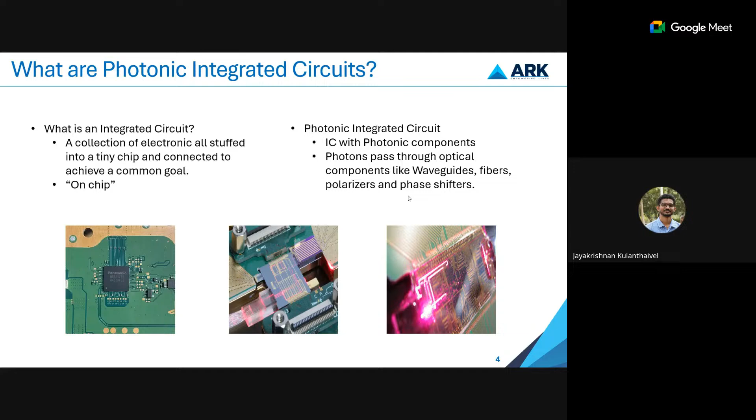In PICs, we use a laser source to inject light into the optical components. The light is then transported through these optical components without any significant losses and with a wide bandwidth, for a particular common goal or specific application. Also, using light instead of electricity in integrated photonic technology provides a solution to the limitations of electronics like integration and heat generation, taking these devices to the next level.

With the inclusion of PICs in electronic integrated circuits, we realize many new possibilities. One of them is the ease of quantum computing. Quantum computing was already there even without PICs, but PICs made it faster.

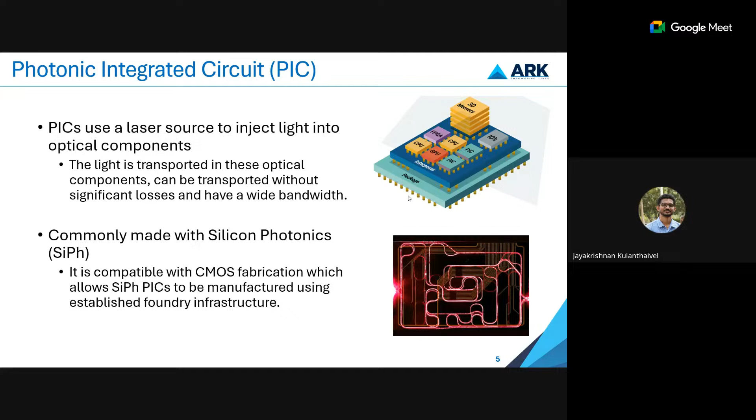The fabrication of these PICs is similar to the commonly used CMOS fabrication technology. The way we make EICs, electronic integrated circuits, we can make photonic integrated circuits. But electronic ICs are mostly made of silicon wafers, while in photonic integrated circuits, apart from silicon, we can use silicon nitride, gallium arsenide, chalcogenide glasses, lithium niobate, and other materials.

And how do these PICs work? PICs work on the principles of manipulating and harnessing light for a variety of functions. This involves photonic signal transmission from one end of the waveguide to the other, using different techniques like evanescent field coupling, total internal reflection, and plasmonic activity. They have active and passive components.

For example, a resonator will act as a wavelength filter. The purpose of a waveguide is to transfer light from one end to the other. Combined, they work together to achieve a common goal.

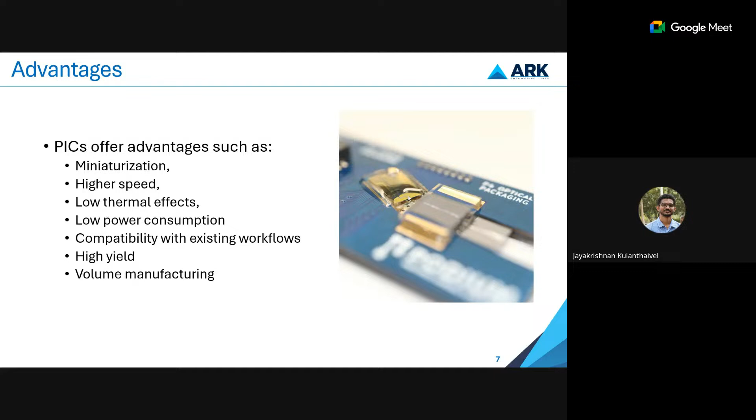Some applications of PICs are sensing applications - compact and sensitive sensors for temperature, pressure, chemical, and composite detection, used in environmental monitoring, healthcare, and industries. People are using PICs in the medical field for enhancing diagnostic tools, imaging, and therapeutic devices. One example is cancer cell detection, where these photonic sensors can be used effectively, and there are numerous research articles on that.

Another application is quantum computing, which we'll discuss in terms of potential quantum information processing and quantum state manipulation like qubits. We are able to generate qubit photon sources with the help of these PIC networks.

LiDAR systems are used in autonomous vehicle systems as well as in military and aerospace. Spectroscopy is used for chemical analysis, material characterization, as well as environmental characterization. Then military and aerospace - PICs are used in communication systems, sensing technologies, as well as imaging devices.

Why we are using these PICs in military and aerospace is because they are resistant to electromagnetic interference. Either the electric field or the magnetic field won't interfere with the propagation of a photon, so it cannot be easily detected, and it has high performance as well. And in general consumer electronics: displays, cameras, and wearable devices. So PICs have a wide variety of applications.

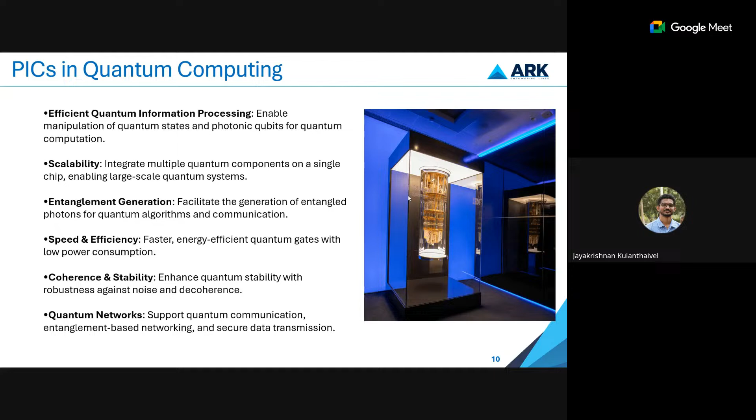Now we have discussed photonics and photonic integrated circuits. Now, why do we need simulations? For developing these photonic integrated circuits, since they are CMOS fabrication compatible, we could directly go for fabrication. So why do we need simulations before going into fabrication? Because PICs are very expensive in R&D and hard to prototype. Technically, developing these photonic integrated circuits to achieve a common goal is an iterative, repetitive process.

For example, if you're designing an optical fiber to transmit 5 gigabytes of data with minimal loss, you have to optimize it for better performance - changing the core width, using different materials, using a different wavelength. This is an iterative process, so we cannot achieve optimal performance initially while developing the prototype. Simulations help us reduce that and cut down costs, because optical components are very costly to fabricate. We can test and analyze the performance of photonic integrated circuits and predict more accurate outcomes.

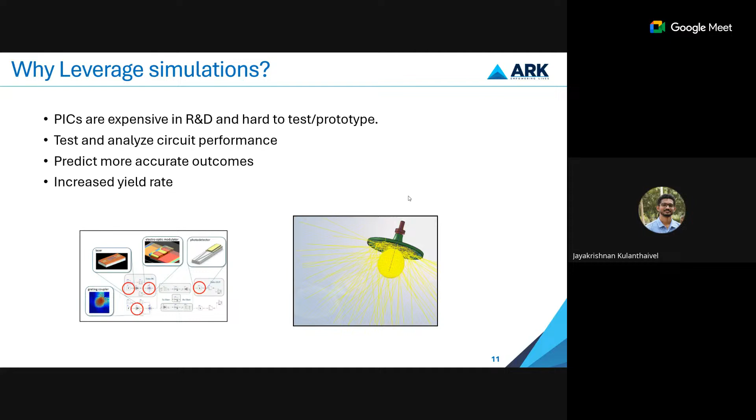If, while doing the simulations before going for the prototype, we are able to identify issues, it will save us a lot of money. So early issue detection is very much possible with simulations, as well as reduced prototyping, and it increases the yield rate - we can produce more prototypes or the things we want within a short span of time. These are the reasons for us to leverage simulations in developing photonic integrated circuits.

In ANSYS, we have a complete system optimization and collaboration consolidation for developing different kinds of physics. We have different physics-based simulation softwares: here for structures, this is for mechanical fluids, for computational fluid dynamics.

We have dedicated electronic simulation softwares specifically for semiconductors, and we have optical, 3D, and photonic softwares. All these softwares are multi-physics, which means if you did something with structures, you can use the output of that as an input in the optical simulation. This helps us create complex models involving multi-physics simulations, like a CubeSat.

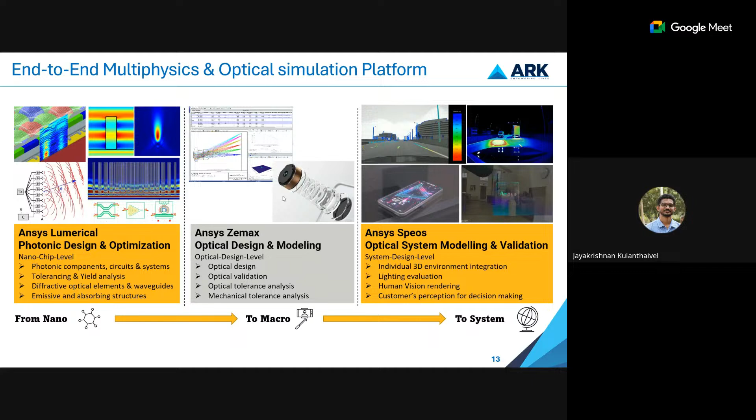Our ANSYS Optics suite offers an end-to-end multi-physics and optical simulation platform. We all know that light behaves differently with different matters. It is a multi-scale platform. For example, light interacting with a nanomaterial is different than it interacting with the material of macro systems like lenses and mirrors.

At the larger level, we cannot observe certain phenomena like diffraction and interference. But at the nano level, we will be able to observe many other phenomena as well, which includes plasmonic activity.

For this multi-scale physics, we have three different softwares. One is ANSYS Lumerical, our photonic design and optimization software. We have ANSYS Zemax, which is specifically for designing optical systems like lenses, mirrors, and lasers. And we have our optical system modeling and validation software, ANSYS SPEOS, specifically for designing lighting systems—ambient, outdoor and indoor lighting—as well as human 3D integration and all kinds of related things.

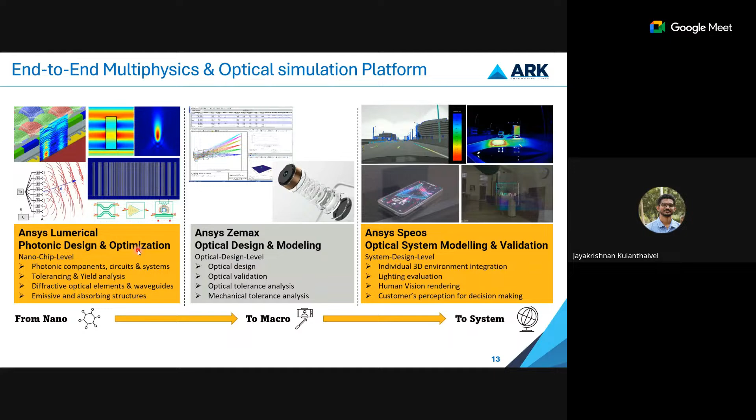Totally we have three different tools, but here we are going to discuss ANSYS Lumerical for developing and designing photonic integrated circuits, which involves two different types of physics. Technically, these softwares solve problems by employing mathematical techniques as well.

But in the case where the feature size is much greater than the wavelength—for example, if we are using visible wavelength and the size of the materials are in millimeters or meters—we will use ray tracing, considering light as a ray that travels in straight lines. But when feature sizes are on the order of the wavelength, we consider light as traveling as a wave, and at that time we have to use wave optics.

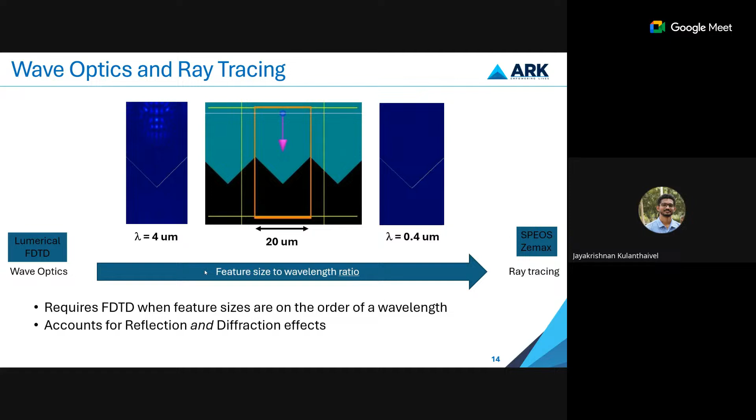This is a brief introduction to ray optics. Ray optics is based on straight-line propagation of light, dealing with mirrors, lenses, refraction, and reflection. In ray optics, we won't discuss phenomena like interference, diffraction, and polarization, which cannot be explained with ray optics. Ray optics is well suited for explaining phenomena in mirrors, lenses, and lasers, where we consider light traveling as straight rays.

This means the optical suite that we have, Zemax and SPEOS, employs this ray optics technique to solve problems. Wave optics is also called physical optics, but it deals with various phenomena other than reflection and refraction—polarization, diffraction, interference, and other occurrences where the ray approximation of geometric optics is not appropriate.

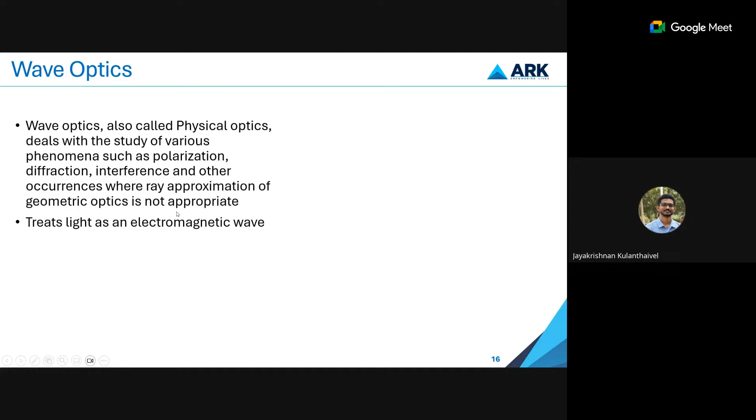In wave optics, we treat light as an electromagnetic wave. Generally, the numerical tool mathematically predicts how photons move through space or a material using four differential equations—Maxwell's equations—which govern how an electromagnetic wave propagates in free space. Our numerical tools, especially Lumerical FDTD, use FDTD as one type of solver.

Numerical solvers will solve these Maxwell's equations to predict how photons move through space as well as how they interact with the material.

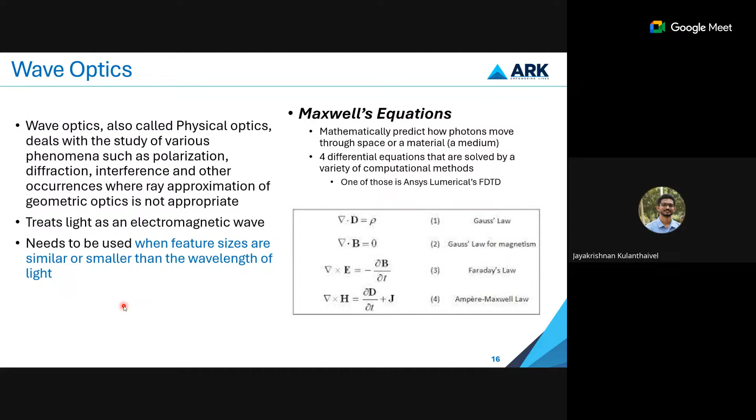So we can use this when the feature sizes are similar to or smaller than the wavelength of the light. If the feature sizes are larger than the wavelength of the light, at that time we have to use ray optics.

So who is Lumerical? Generally, Lumerical is the industry leader for photonics multiphysics simulations, though there are other photonics multiphysics simulation software like Comsol and Synopsys. Lumerical is the industry leader and continuously innovates solvers to complete their photonics portfolio for multiphysics. We have this multiphysics feature, and we have also partnered with Cadence and Mentor.

Cadence and Mentor are actually electronic IC, analog and digital circuit development platforms. This workflow integration with Lumerical allows us to develop complex PICs with ease. And we have partnered with many industry leading foundries like CompoundTek, TSMC, UMC for PDK development.

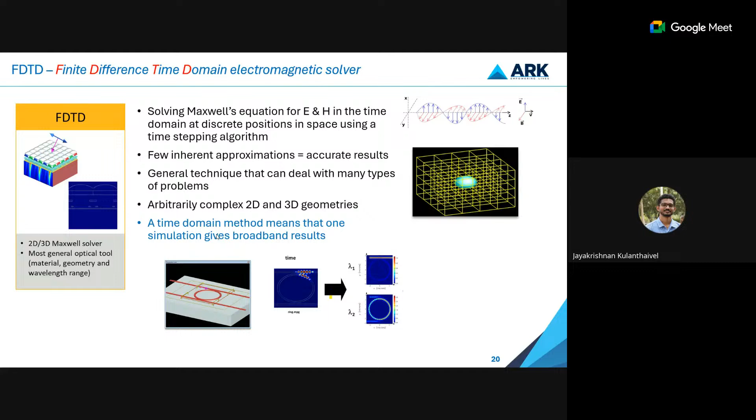And these are some of the applications: diffraction gratings, meta lenses, liquid crystal metrology, LEDs, and image sensors as well.

Next, within FDTD, we have another solver called the Stack optical solver. The Stack optical solver is similar to FDTD, but it gives us the solution particularly for plane waves incident on a multi-layer stack - for example, a Bragg grating or a distributed Bragg reflector.

At that time, you don't need a complex simulation - there will just be reflection and transmission at each interface. So in order to solve these kinds of simple structures, Stack is preferred because it is fast and it allows length dependent optimization. You can optimize the length easily in this Stack optical solver, much faster than FDTD.

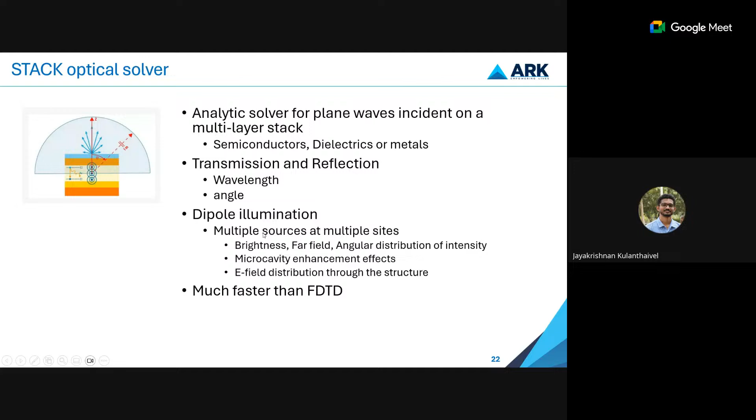So we can record the transmission and reflection, and we have dipole illumination sources as well. We can place multiple sources on multiple sites with the help of the Stack optical solver. Some applications are lenses, anti-reflective coatings which involve multiple film designs as you can see here, and multicolor filters and LEDs.

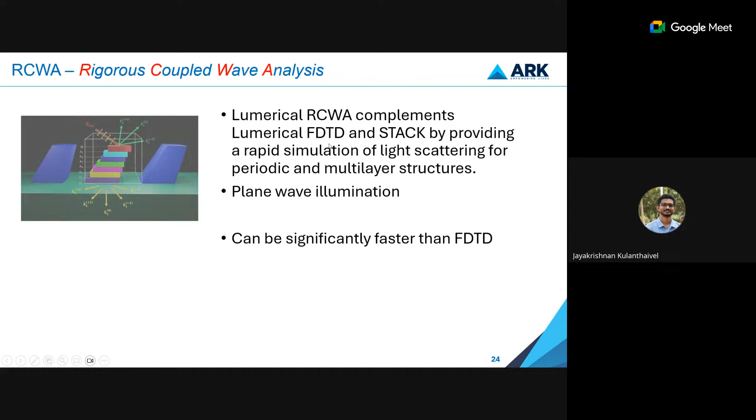And one more solver is rigorous coupled wave analysis. This one complements FDTD and STACK by providing a rapid simulation of light scattering for periodic and multi-layer structures, which is similar to that of STACK. But it has only the plane wave illumination; it doesn't have the dipole illumination and the other capabilities that STACK has. It is actually complementing these two solvers. Both of those solvers, RCWA and STACK, will be much faster than FDTD. Some of the applications are photonic crystals, metalenses, and diffraction gratings.

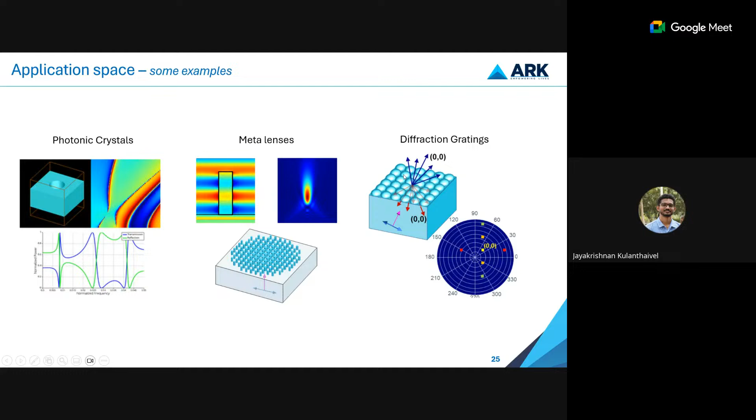The next solver is Ansys Lumerical MODE. Within MODE, we have FDE, EME, and the variational FDTD solver. When light travels through materials with different refractive indices, it can be guided. MODE has 3 separate solvers for different classes of waveguides. We are not only having rectangular or slab waveguides, we'll be having strip waveguides, slot waveguides. So for different classes of waveguides, MODE has 3 different solvers. MODE is specifically used for modal analysis and mode propagation as well.

So we have FDE, which is a finite difference eigenmode solver. Using this solver, we can analyze the modes of 1D and 2D, modes of straight and bent waveguides; it's a mode analysis tool. The next one is varFDTD. varFDTD is nothing but a 2.5D variational FDTD solver. Instead of using FDTD, you can use this variational FDTD solver for simulating components like ring resonators and couplers. Variational FDTD can be used for almost 90% of photonic component simulation.

This variational FDTD can be used as an alternative to FDTD for components like ring resonators and couplers. It cannot be used when there is vertical coupling. Let's say I'm propagating the light along the x-axis, and I observe the coupling in the z-axis. Then I cannot use this variational FDTD solver; instead, I can use the FDTD solver. But if the coupling is happening horizontally in the same plane, then we can use this solver. It will collapse the 3D planar waveguide geometry into 2D effective materials. Thereby, we are able to get FDTD-accurate simulation results with this solver as well.

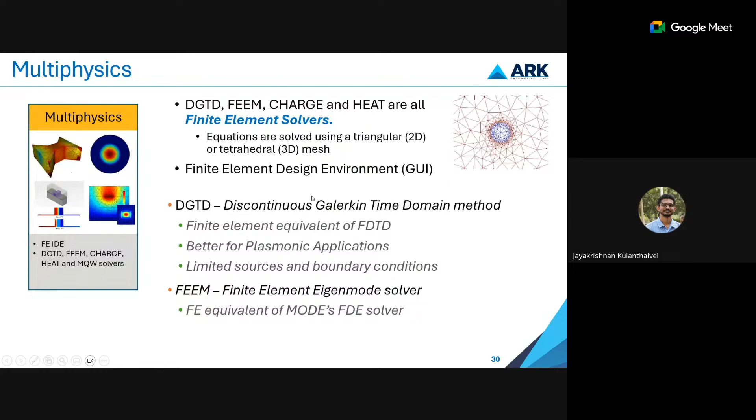And we have two other solvers, CHARGE and HEAT. CHARGE is a charge transport solver. It looks at the electrical properties of charges as they move through metals and optical materials as well as through semiconductors. This is often used in combination with FDTD. Light absorption is modeled with FDTD, then the collection of generated charges is modeled using CHARGE.

So with the help of CHARGE, one perfect example for using this Lumerical multiphysics is developing a solar cell. Not solar panel, we have to be very careful, developing solar cells actually. Next, some of the applications are CMOS image sensors, LEDs, and avalanche photodetectors.

And HEAT. It's a heat transport solver. Unlike CHARGE, which is an electron charge transport solver, this is a heat transport solver. Some of the things that we can do with this, we can observe conduction, convection, radiation, and Joule heating. What the solver is actually doing is showing how the thermal profile in a material is altered when the material is subjected to electrical heating, which means when you are passing a current, as well as optical heating, how the thermal profile is changing when it is absorbing light.

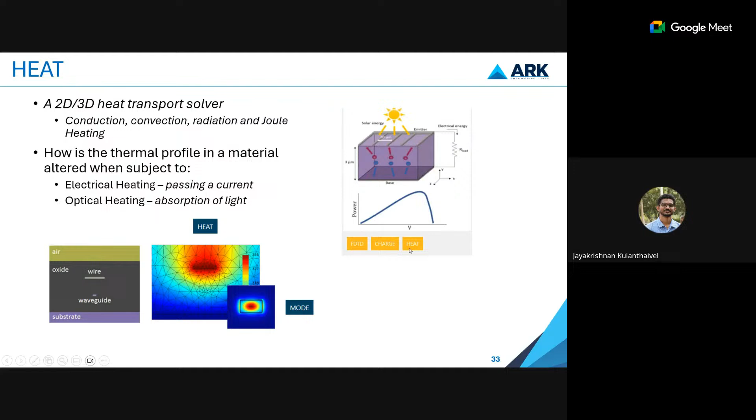So next is the multi-quantum well solver. This solver is specifically used for quantum mechanics. Quantum mechanics, as we know, is a little bit different from classical mechanics. The study of subatomic particles reveals unique and fundamental natural principles. Some of these fundamental phenomena can be effectively simulated with the help of the MQW solver. It has a large material database of group III-V semiconductors.

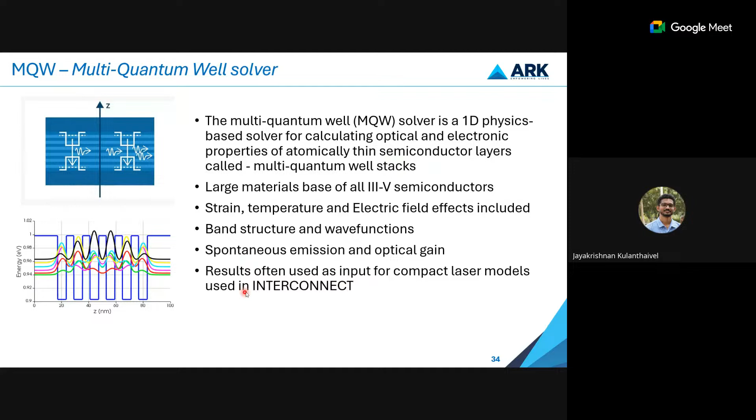Strain, temperature, and electric field effects are included. We are able to analyze the band structure, and it has wave functions, spontaneous emission, and optical gain features. These results are mostly used for compact laser models in INTERCONNECT. So the output of this can be used as an input when we are developing a compact laser model in INTERCONNECT. Some of the applications are the active region of lasers, electro-absorption modulators, and developing micro LEDs.

So with the help of MQW, this quantum well solver, as well as the CHARGE integration, which is actually a new feature of Lumerical, the applications are reverse biased electro-absorption modulators and forward biased LEDs with active quantum wells.

So for photonic integrated circuit simulation, we have a dedicated solver, which is INTERCONNECT. It simulates at the integrated circuit level. With the help of INTERCONNECT, we can develop classical PICs as well as quantum PICs, and we can develop a traveling wave laser model as well.

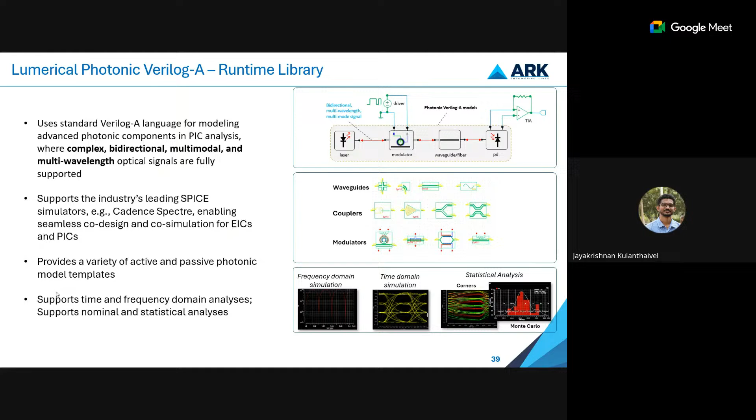And next, Cadence Virtuoso plus Lumerical interoperability. I hope the people who are working with electronic ICs might have heard about this Cadence Virtuoso software. Cadence is one of the leading software for developing analog and digital electronic integrated circuits. So integrating Lumerical with Cadence Virtuoso will help us to effectively develop electronic and photonic integrated circuits together.

And next is KLayout. KLayout is actually a CAD design software. It is used to design layouts for photolithography techniques. So whatever we are designing, we have to print it on a silicon chip or other wafers. For that, we need to design our structure, right? So for that kind of design, we can use KLayout.

With the help of this integration with KLayout, we can export the layout to Lumerical multiphysics tools, as well as use these process files to construct 3D structures for simulation. With the help of this, we can directly extract the circuit layout netlist to build a Lumerical INTERCONNECT circuit schematic, and within KLayout we can also do frequency and time domain analysis.

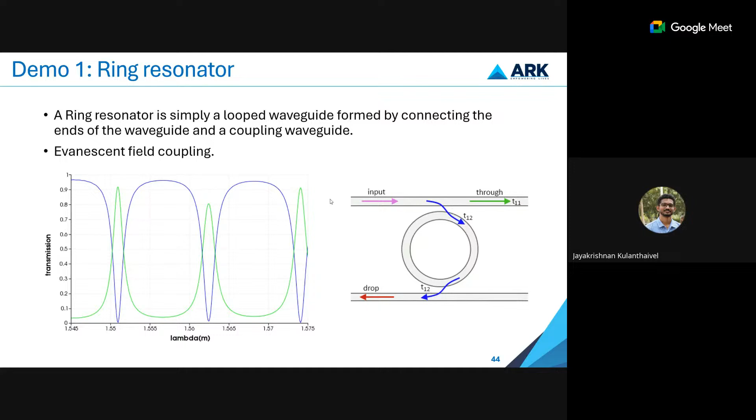Ring resonators are widely used in almost all places. It is one of the key components, like transistors in electronic ICs. The ring resonator is a very important component in photonic integrated circuits. Some of the applications are optical filters, modulators in telecommunications, sensors, frequency comb generation and supercontinuum generation, like nonlinear optics, and also quantum computing.

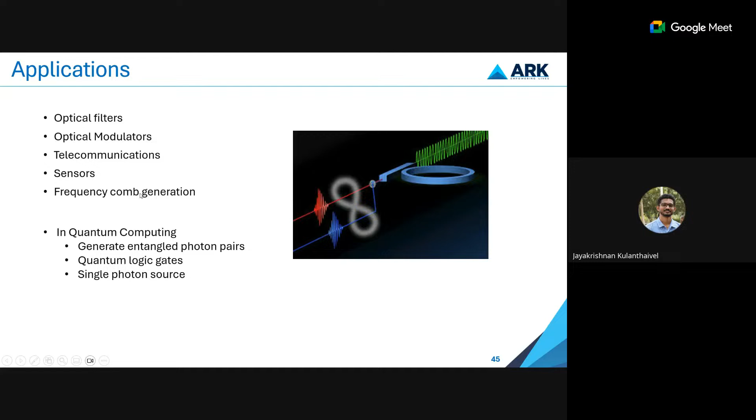In quantum computing, we can generate entangled photon pairs. One such example is wave mixing, then four-wave mixing. Then we can develop quantum logic gates with the help of these ring resonators, and it will act as a single photon source as well. So technically, a ring resonator is actually a photonic device.

This ring resonator can be simulated both on the device level with physics-based simulation tools such as FDTD or MODE, or with circuit level simulation like INTERCONNECT. We are going to simulate the ring resonator in INTERCONNECT. This is the double bus ring resonator, which means it has two waveguides on both ends, and between the waveguides we have this ring structure.

We are segregating this physical model into different components. There are two straight waveguides here, and there are two waveguide couplers, which means here the coupling will happen, and there are two bend waveguides. By dividing the ring resonator into different segments, we will be able to effectively develop a ring resonator circuit

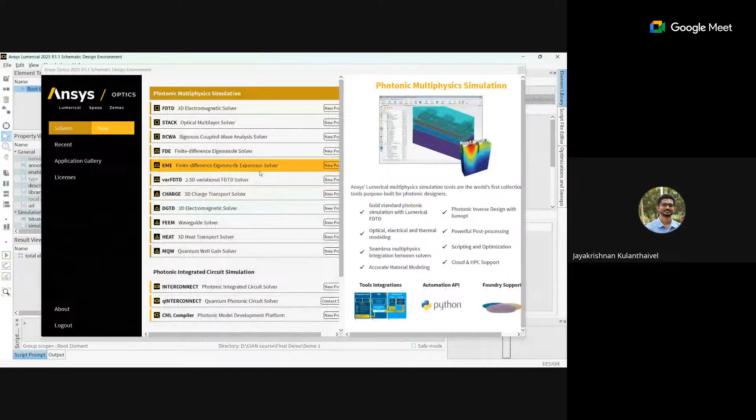Now I'll take you to the INTERCONNECT interface. It's loading, it will take some time. This is our INTERCONNECT schematic editor.

At the center you can see this root element.

I hope my screen is visible. Can anyone confirm it?

This is where our circuit will look like, and this is our library. We'll be inserting the components into the layout editor from this library. And here we'll see the description of the models we are selecting. If I click the waveguides, you can see the different waveguides we have here. And this is the property view. Whatever component I select, the corresponding properties will appear here. We can edit and modify the properties as well.

And this is the result view. Once we run the simulation, we will be able to observe the results here. Now we are going to develop a ring resonator structure. For that we are going to segregate it into different segments and develop it with waveguide couplers and straight waveguides. Now I went to the element library. Here you can see the waveguides. I'll start with the straight waveguide.

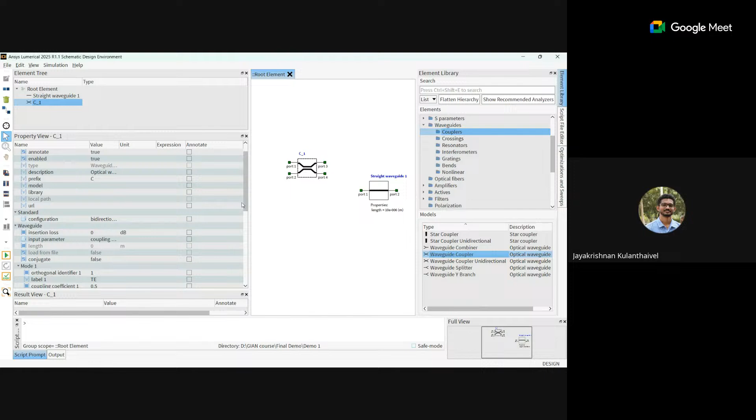Next we are going to import a waveguide coupler. Now I'm going to rename the coupler to waveguide coupler 1. And now I have renamed it to waveguide coupler.

So in a ring resonator, the coupling into the ring is based on two things. One is coupling length and the other one is coupling gap. We cannot directly enter the coupling gap here in INTERCONNECT. Instead, the coupling gap is mathematically expressed as the coupling coefficient. So instead of entering the coupling gap, we can enter the coupling coefficient here, and that will determine the coupling gap.

So for the waveguide coupler, if you hover over this, you can see there is a waveguide input parameter. We have three options: coupling coefficient, length, and table. If you have a table, you can load a file with the data of different coupling coefficients for different values. Here we don't have that.

So instead, we are going to enter the coupling coefficient for mode 1. Here we'll be discussing the TE mode only. We are going to keep the coupling coefficient as 0.2. Changing the coupling coefficient means we are changing the coupling gap between the bus waveguide and the ring waveguide. Other than that, you just need to keep all the things constant.

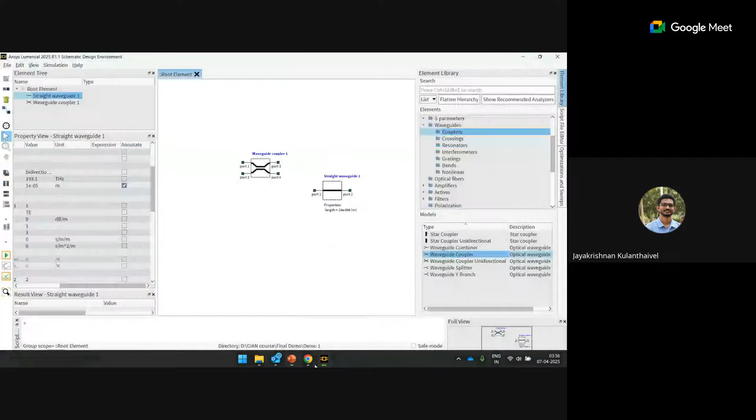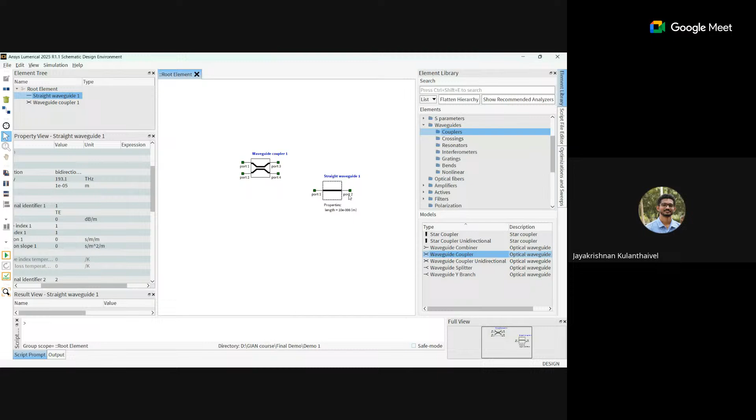So going back here. And also we are assuming the ring radius as 40 micrometers. Now I'm going to rotate this waveguide by pressing Ctrl+R. Now you can see it is rotated. Now I have to determine the length. How can I determine the length?

This entire ring resonator structure is segmented into four components: two straight waveguides and two waveguide couplers. The waveguide coupler doesn't have any coupling length, which means it is completely arc. For a ring, the circumference is 2πr. Let's say we have two semicircles; then it is πr plus πr, right? So the length of a single straight waveguide is πr.

So we can change the unit and in the expression we can type pi star the ring radius, which is 40. First, before entering the value expression, just make it 0. Now you can enter the expression pi star the radius of the ring.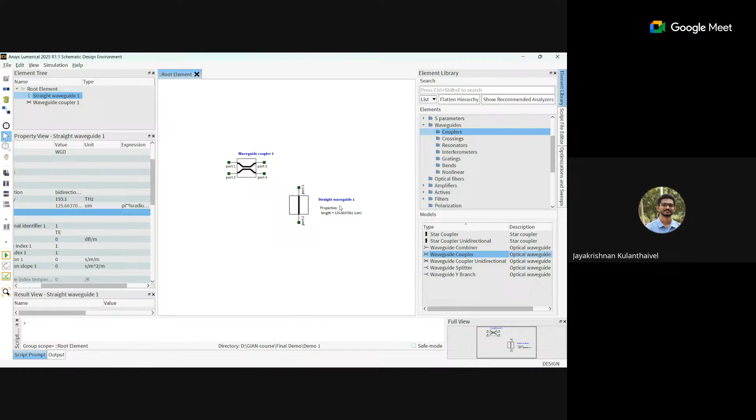Now what I'm going to do is create a copy of each of these two waveguides as well as in the coupler. I'm going to change its name to straight waveguide 2, as well as this one duplicated. I'm going to keep this here, so which is waveguide coupler 2.

So now I have created the complete ring components. Now I have to create a connection. You can create a connection either by using the mouse - you right click once here and then drag the mouse to the other port, then you can do the connection.

Otherwise, if you press alt plus C, you just hover it, and your system will automatically detect the nearest port and create a waveguide. Now we have created a ring structure. Now what we need is an analyzer to inject light into the ring resonator structure.

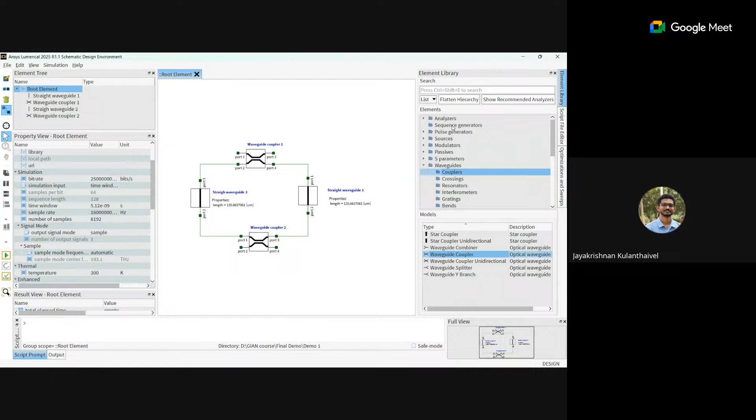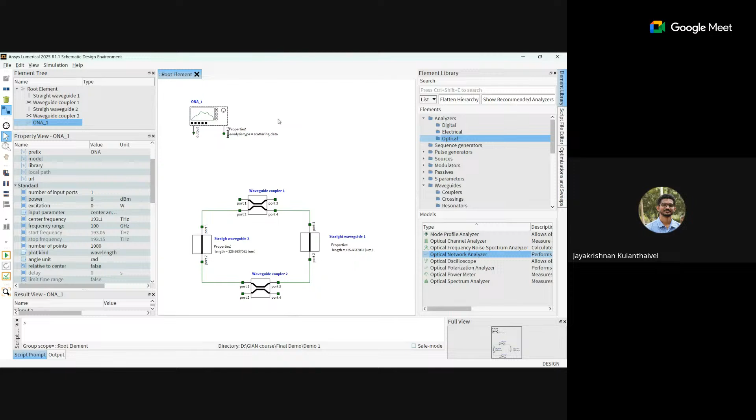For this, go to the library and here we have analyzers. Click on optical, and we are going to do the optical network analysis. This is actually for frequency domain analysis, not time domain analysis for now. This optical network analysis will help us inject the light source at the desired wavelength as well as detect the output, and it will help us launch multiple numbers of inputs.

So you can see I can keep it 3, which will give us 3 input ports, two input ports. As of now we don't require any number of inputs, so I am going to keep it as one number of inputs. Now I'm going to launch the light through this port and record this one here.

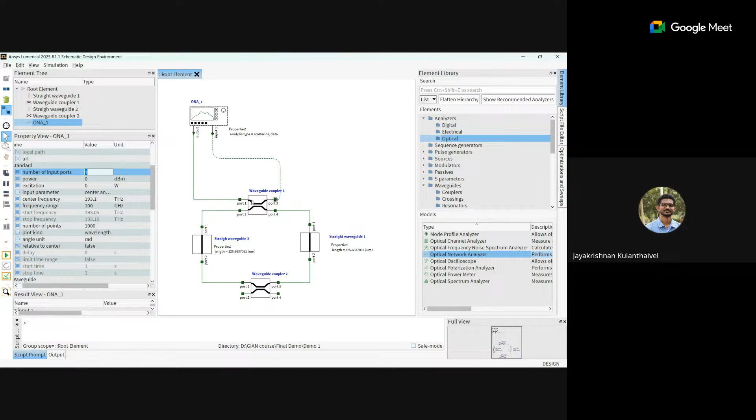Since we are using this double bus ring resonator, we need to extract details from the drop as well. This is the input port, this is the through port, and this is the drop port. So I am going to add one more input.

Now our circuit is complete. The next thing is we have to check whether we have created the property, the input waves, and everything fine. So here we are going to launch the waveguide at the central frequency.

By clicking on this unit, you can see you can change the frequency to wavelength as well. If you click the nanometer, you can see it is around 1552 nanometer, so it is okay to keep it at that. The frequency range is actually the spectrum broad range, and it is only given as 100.

So what I'm going to do is increase it to 1000 gigahertz, and the number of points is 1000. You can increase the number of points to have a much sharper resolution - increasing the number of points gives better resolution. But as of now we have a small frequency range, so 1000 points is enough.

You can see the orthogonal identifier is 1. So what I'm going to do is have this one as my ortho, which means this ONA will launch the TE mode. If I make it 2, the ONA will launch the TM mode. So let's keep it as 1. You can also change the labels for different modes.

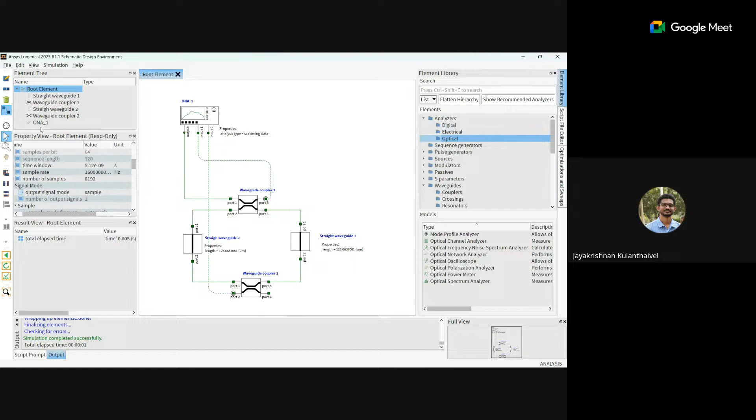The simulation completed successfully. Now in order to identify results, these are components, and our components won't be having results. So this is our analyzer, and our analyzer will have the results. So go to the element tree, click on this ONA, and now come to the result view.

Here you can see for input 1 we are launching the light, so for this we look at the transmission. Now we got the transmission, which is a transmission spectrum that we are able to observe for the ring resonator, similar to that of that.

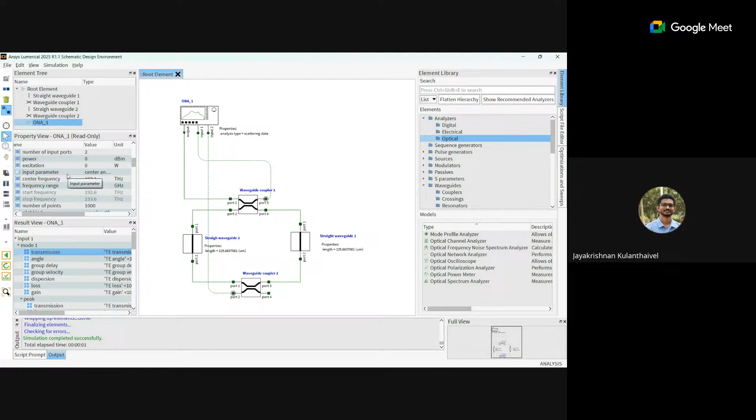Now we'll keep the layout. We don't close this visualizer. Now what we will do is try to launch a different mode and see how our results vary. Now again, go to the straight waveguide.

Try to edit the effective index and group index in the property view. You cannot edit it because it is in analysis mode, so run mode. You have to switch to design mode, and only then can you edit the properties of the components. Now I am going to make it 2.8 and 3.9.

Similarly, for the other waveguide also do the same thing. Now we have changed the mode to effective index and group index. Now go to the ONA. Here you can see the orthogonal identifier is 1. Now what I am going to do is change it to 2, which means now our ONA will launch the TM mode into the waveguide.

Now rerun the simulation. The simulation is completed now. If you add this to visualizer 1, you can see using a different mode we got different results.

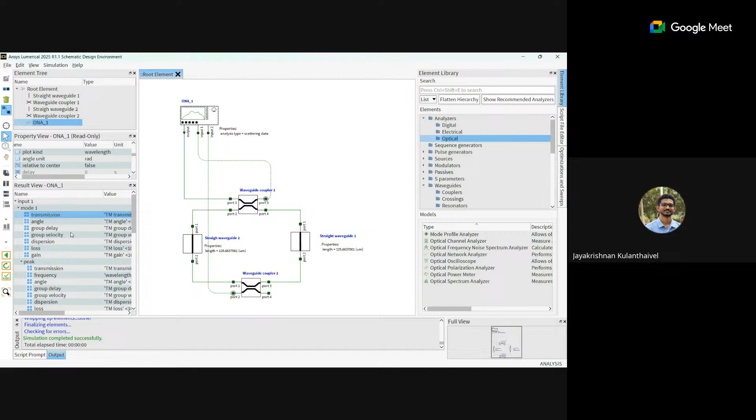In the previous demo, what we did is we directly entered the parameters, the coupling coefficient, the effective index, or the group index, directly into the INTERCONNECT file. But here, what we are going to do is create a coupling region in ANSYS FDTD.

From there, we are going to extract the coupling coefficient, as well as the effective index and group index using this ANSYS mode solver, and import these two properties into the interconnect. Then we'll be analyzing the transmission spectrum. Let's see how we are going to use it, how we can do that.

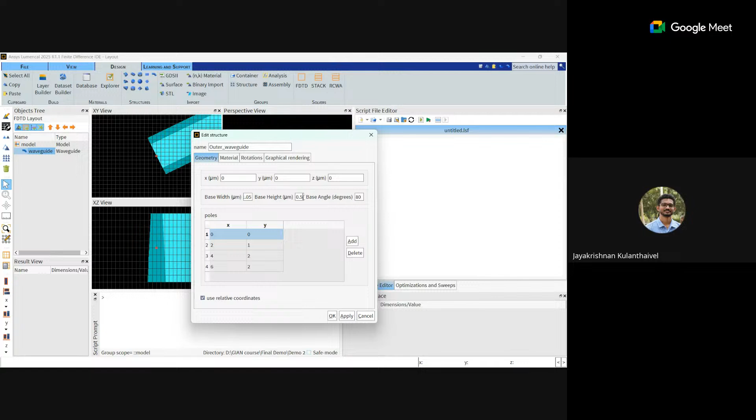Let's create the straight waveguide. I'm going to name this as the outer waveguide. As I said, we are going to have the base width of 1.05 micrometer and the height of 0.5 micrometer.

Now these vertices are actually the points of a straight line traveling through this waveguide. For modeling a straight waveguide, you don't need more than 2 points. Since we are modeling an outer waveguide, we can remove the extra points and mention only the start point and end point.

Now once I have fixed the geometry, the next thing is we have to assign the material for that. Here we have an inbuilt material library. These are the different material models that come with Lumerical FDTD itself. Additionally, you can import materials.

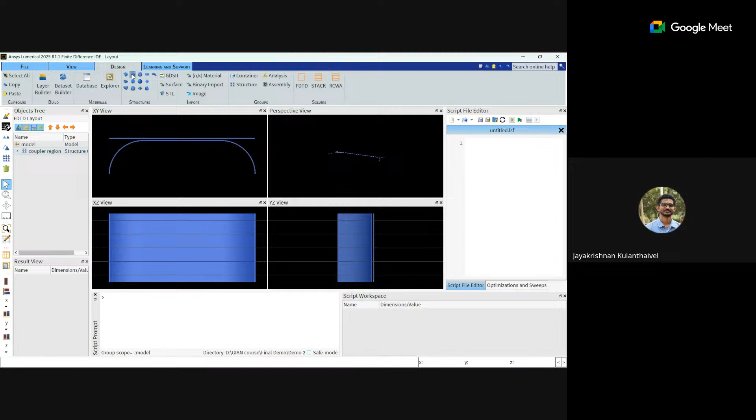Now what I'm going to do is add all these waveguides into a new group, and I'm going to name it as coupler region. Now I have created this coupler region. I need to create a substrate where it has to reside on. So for that, click the rectangle. So this will be our cladding. So we start as minus 2.

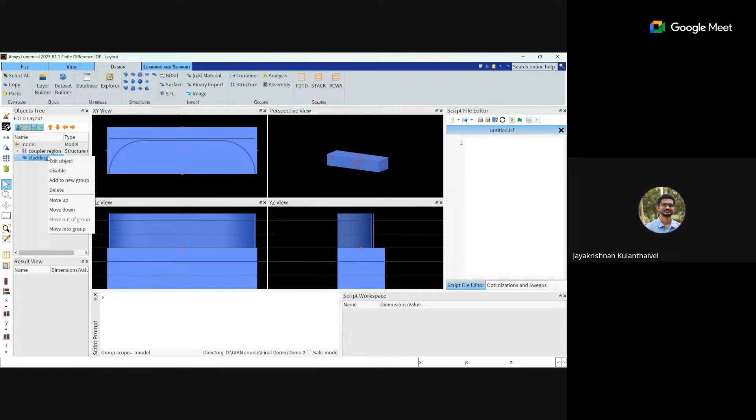So you can change the geometry of the solver so that it can align perfectly within the structure. So geometry, I'm going to set 7.5 and 42.5. From the settings, I'm going to keep the default only. You don't need to change anything.

And we are keeping all the boundaries as PML. PML means perfectly matched layers, which means by applying these boundary conditions, it will absorb all the incoming light. It won't account for the reflection. So PML is actually the most common boundary condition, used for most of the simulations. So keep all the things at default settings only. Yeah, now we have added the FDTD.

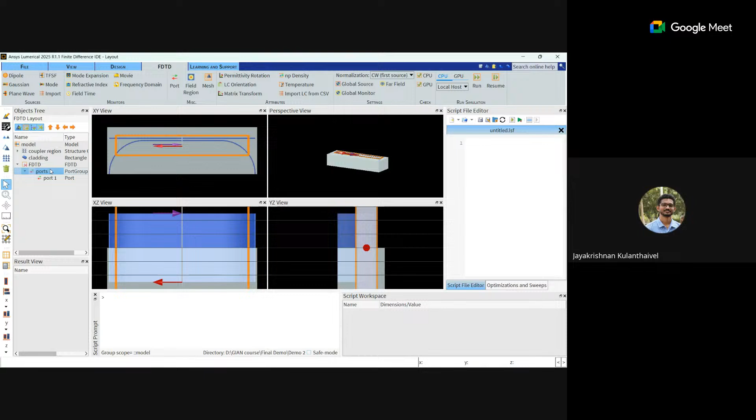Now, in order to find the coupling coefficient, we need to launch the source from this end, and we have to calculate the reflection from this end or that end. So for that, I'm going to add a source. What I'm going to do is add a port source. So as you can see, this is the port group. Within this, we'll be having ports.

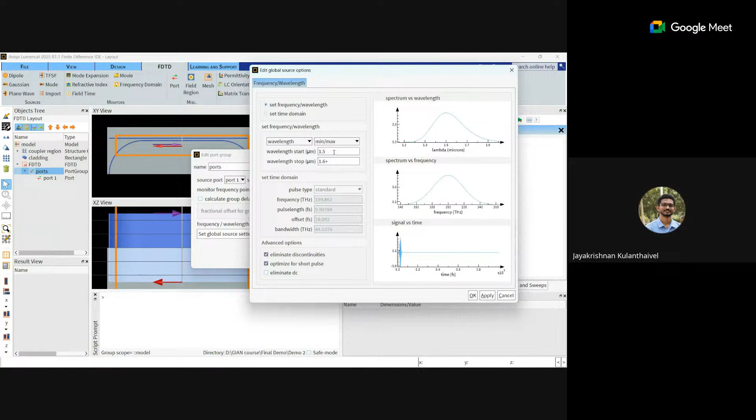So I'm going to increase the frequency points to 20. Having higher frequency points will give you a better resolution, but it will also increase the computation time as well. So keep that in mind. Now I'm going to keep the start wavelength as 1.5, which is in the telecommunication wavelength, and 1.6 as my stop wavelength. So apply this. That's it. Now we have set the basic group settings.

Now we have to edit the port. Now top right. So since this is a straight waveguide, you don't need to do anything in the geometry. What you have to do is align the port at this point. For this, align to 10.5.

Now you can see that the port is aligned at this end. Now I'm going to increase the port profile samples to 3, which will increase the resolution, and I'm going to look for the fundamental TE mode. Now you have to check this one. Injection is along the x-axis and direction is forward. So you can see there is a small purple arrow. That purple arrow indicates the direction of mode propagation.

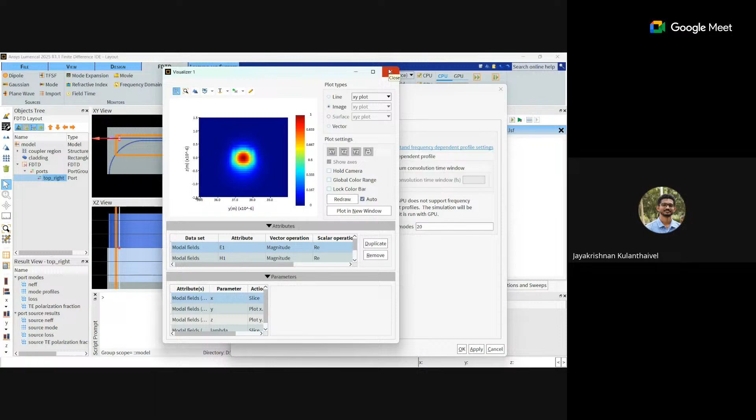Now let's visualize the mode data. If you click it, the solver allows you to see the mode. Now you can see the mode inside the waveguide. So this mode is actually good. It is confined well inside this straight waveguide. Now we can proceed with the further simulation parameters. Now I'm going to click OK on it.

What I'm going to do is, if I zoom it, you can see there is a purple arrow. This purple arrow indicates the port which is going to inject the mode, and this purple arrow indicates the direction of mode propagation. Now just click duplicate, edit, rename it to top left. So just modify this to 37.5.

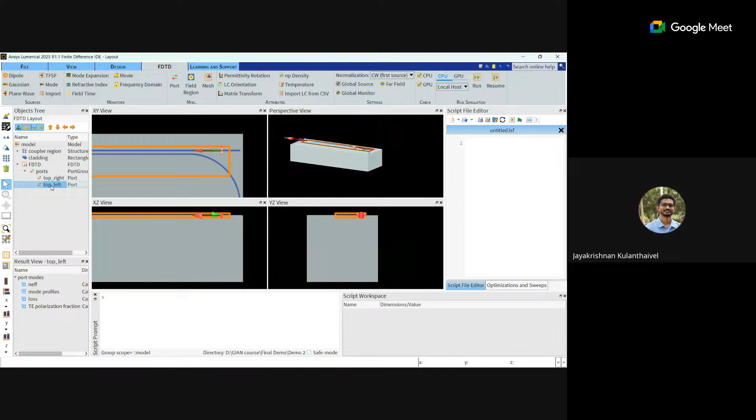Yeah. Now you can see the green arrow and the red arrow are pointing towards this direction, which means the mode is traveling in this direction. But actually, we are launching the mode from positive x to negative in this direction along the x-axis. So what we have to do is change the direction to backward. So this indicates that the mode is traveling from this end of the waveguide to this end of the waveguide.

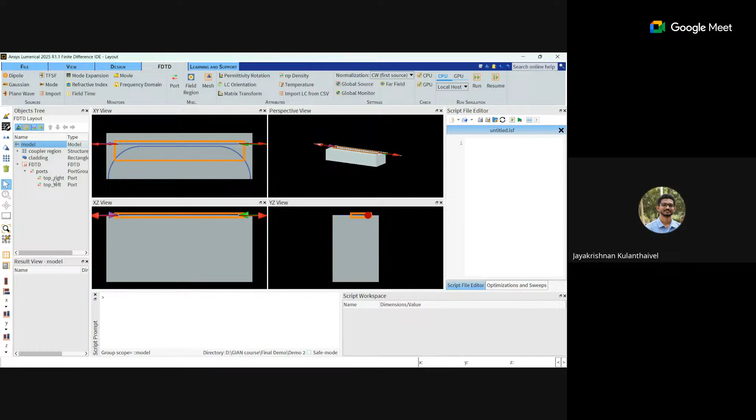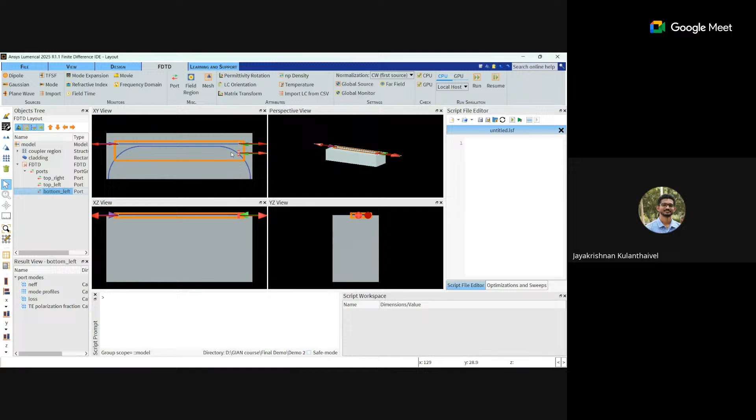Now we have to keep the modes to analyze the mode traveling through these bend waveguides. So for that we are going to add two more ports. So click duplicate, edit, name it as bottom left. So keep it as 35, 40, and 27. Yeah. Now you can see it is almost aligned with the... it is aligned at the center.

So here what you have to do is tell the solver that this portion is actually a bend waveguide. For this you have to click this checkbox, and here we are assuming the bend radius as 10 micrometer and the rotation is minus 45 degrees. So as you can see, the port actually rotated across the cross section of this bend waveguide.

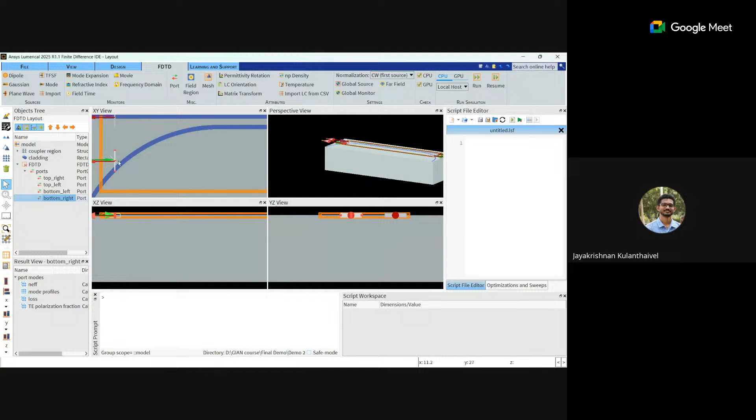Similarly, copy this top right and type bottom right. Change this to bend waveguide, 10 micrometer, and orientation is 45. Since this one is rotation in anti-clockwise, we have to keep that as minus 45, and this will be in clockwise. That's why we have made this only 45. Now if you zoom it, this is not aligned at that place, so try to reduce it further. Okay, yeah, now it is at the point.

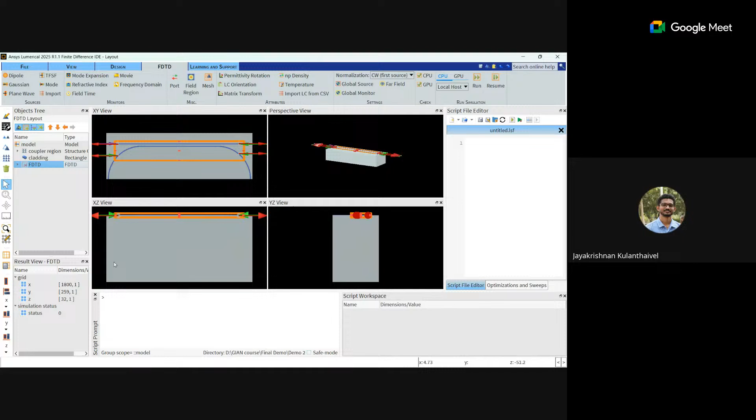Now we have created the complete setup for calculating the coupling coefficient. So this model will launch the light from this direction and it will get coupled into this, and we can get the output spectrum here. So if I click run, this simulation will take some time to complete because it is actually an FDTD 3D simulation. Usually 3D simulations take a lot of time. So for that I already have a simulation with the results. So now I'm going to open it.

Yeah, here I have the results. If you click the port, here you have the visualize option, like your S parameters. So this is the S parameter, and clicking the absolute square will give you the S parameter squared. So with this, I have to extract the coupling coefficient. Lumerical allows you to extract this kind of coupling coefficient from the S parameters with the help of Lumerical scripting. For that, we have written a script.

So I'm going to import the script into the script file editor. I'll just walk you through the scripting, which is very similar to other coding languages like Python as well as MATLAB. If you're familiar with MATLAB and Python, it will be easy to understand. As you can see, this getresult is actually the syntax of Lumerical scripting. FDTD ports bottom right S. So from the bottom right S, it will extract the S parameter, and then it will do the absolute square. It will give you the power coupling.

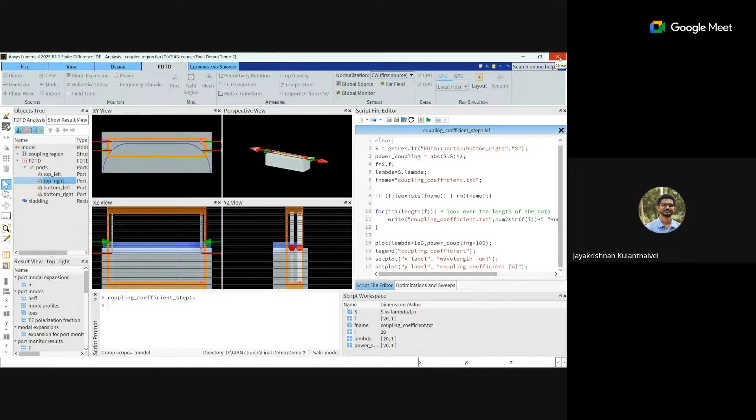Now we are going to find the mode properties of the passive straight and bend waveguide. For this, click MODE. We'll do the mode analysis; it is okay to have only one waveguide, the cross section of a straight waveguide. From that itself, we are able to do the mode analysis. This is the MODE Finite Difference IDE layout.

So click the structure and edit. I am going to type the core material. We know that the core width is actually 1.05 and the height is 0.5 micrometer. So we are adjusting the minima and maxima so as to keep the span. Look at the span now, it is 1.05. Now we are going to change the y min. Since we are focusing on the cross section, you don't need to worry about the z span as of now.

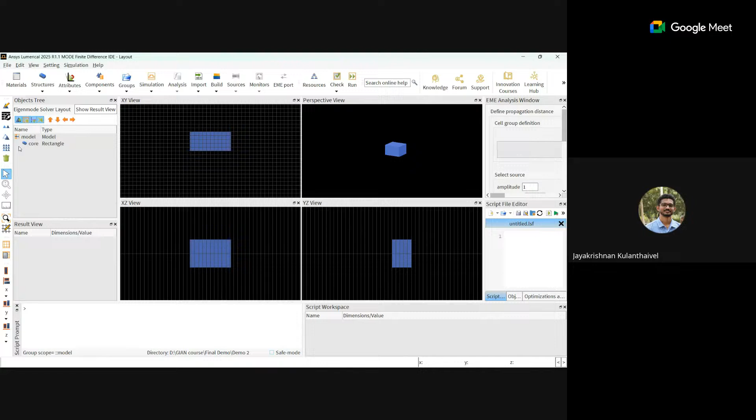So now we have inserted the core. Now we are going to insert the cladding. For that, just rename it as rectangular slab. So x min is equal to minus 5.

Excuse me, give me a moment. Yeah, hello. Sorry for the interruption.

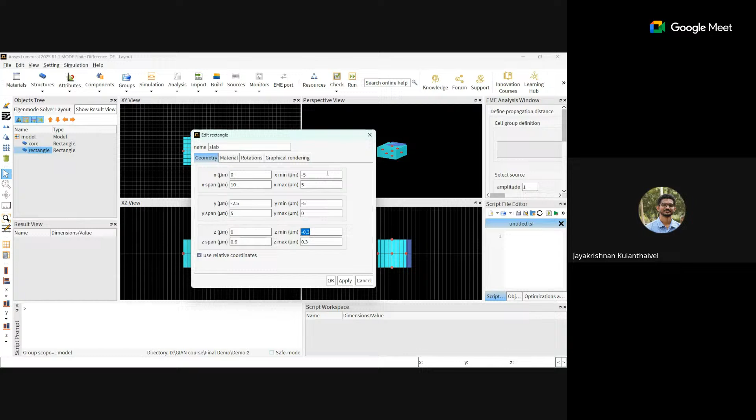So, it's 5, 0. The material will be silica. So that's it. Now we have created our cross section of the straight waveguide.

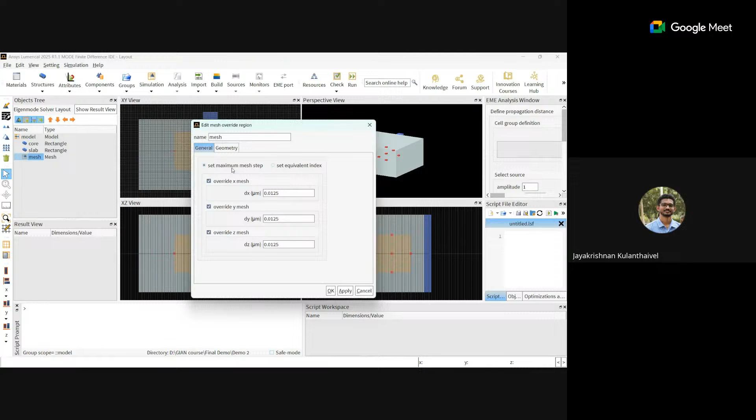Now we are going to add the mesh. Meshing allows the solver to solve the equations in very small regions, so it will help you have a better resolution. Since we are doing it only for the cross section, not in three dimensions, it is okay to override the mesh in the x and y axis. So we are going to keep it like this.

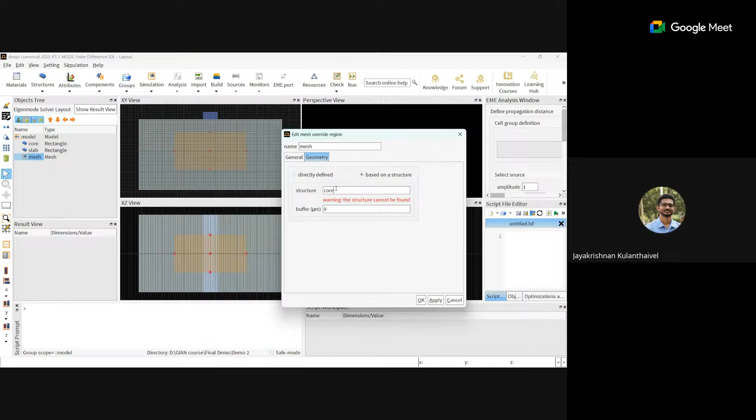Here, in the geometry, you can directly type the geometry values for the mesh, or else you can choose based on a structure. Since we are going to calculate the mode at this core region, I can type the name of the geometry. We click apply. Now the mesh is applied to the core, but you cannot see the mesh. If you want to see it, you can click the mesh button, but you can see the simulation mesh only once you add the solver region.

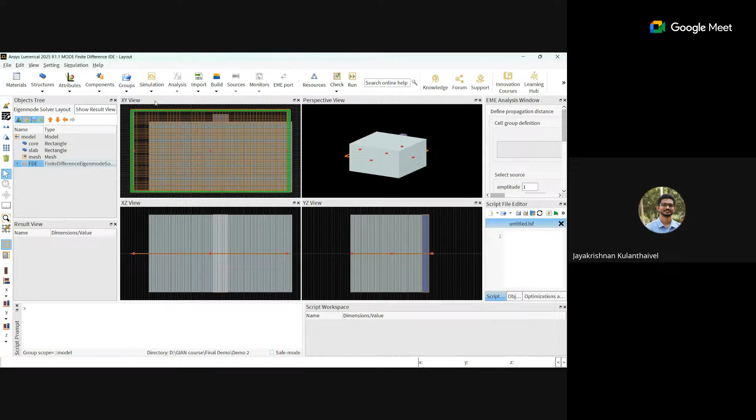So now we have added the simulation region; we have to add the solver region. For the solver, I'm going to keep the background material as 1.44, and minus 1.5, 1.5. I'm trying to keep the mesh settings higher, so it will give us better results.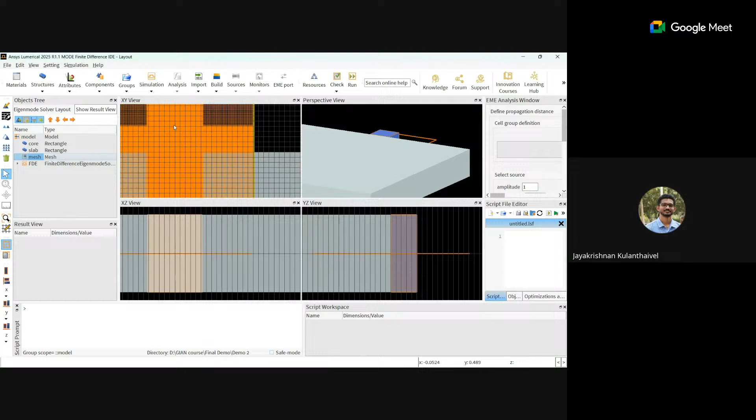Now if you zoom in, you can see the meshing. In the added mesh region, you can see the mesh has been overridden, and here this place is not overridden by the mesh that we have added. Now we can click zoom extent. Now you can click run. It will open an eigenmode solver analysis like this.

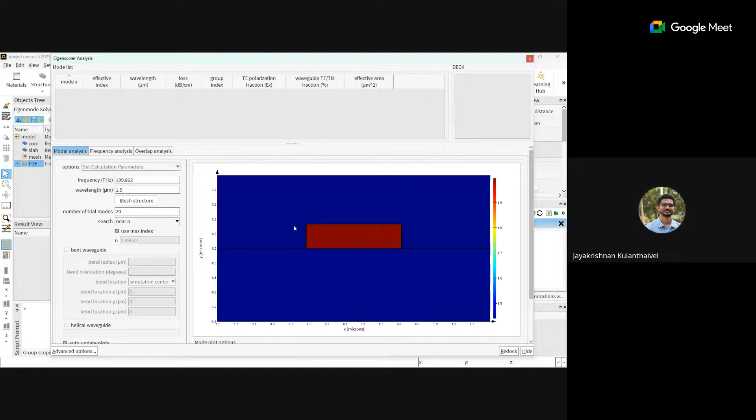Here I am going to keep the wavelength as 1.5. I click the mesh structure. Now you can see it has given the structure. I click calculate modes. You can see it is calculating the modes. Actually, I have added a finer mesh; I think that is why it is taking more time. Let me terminate this.

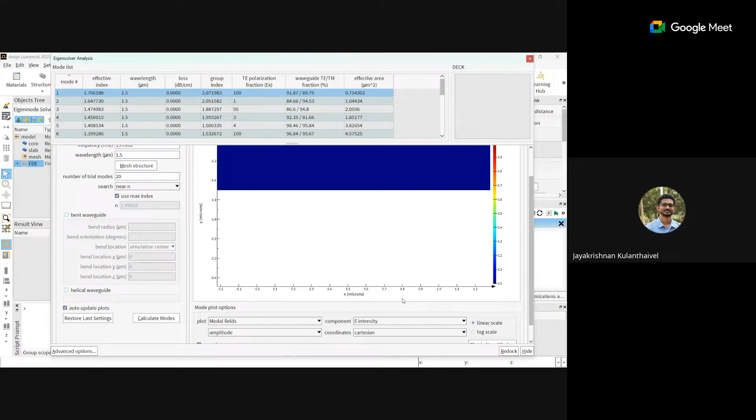Now you can see the mode for the particular wavelength. Click the frequency analysis tab, click track selected mode, detailed dispersion calculation. Keep the number of test modes as 1, and the number of points. I'm going to keep the stop wavelength as 1.6. If I click frequency sweep, it will calculate the frequency sweep for the wavelengths from 1.5 to 1.6 with 10 points for the selected mode. This will calculate only for the selected mode.

What I do is I'll just stop it. The problem is I have added a much finer mesh, so you just disable it. It will take some time, and we don't have enough time. You just disable this, so I'll rerun this. Structure, calculate modes. Yeah, now this won't take that much time. See, it is almost giving the same results.

So now, you click the frequency sweep. It has to sweep it fast. Now we have the results. If you click the frequency plot, you can see all the results that we got. We have effective index, loss, gain, group index, group velocity, and every detail.

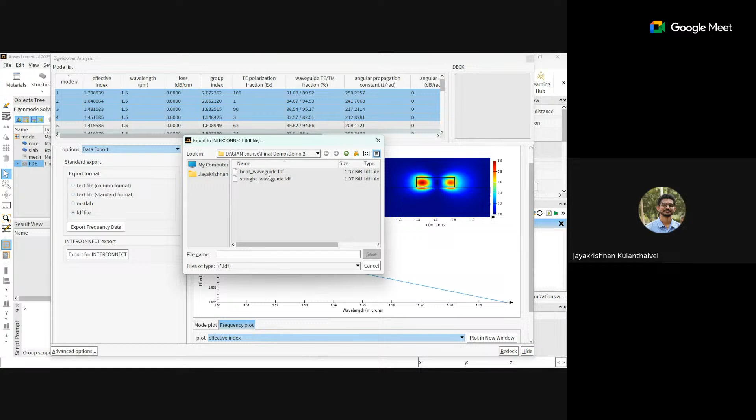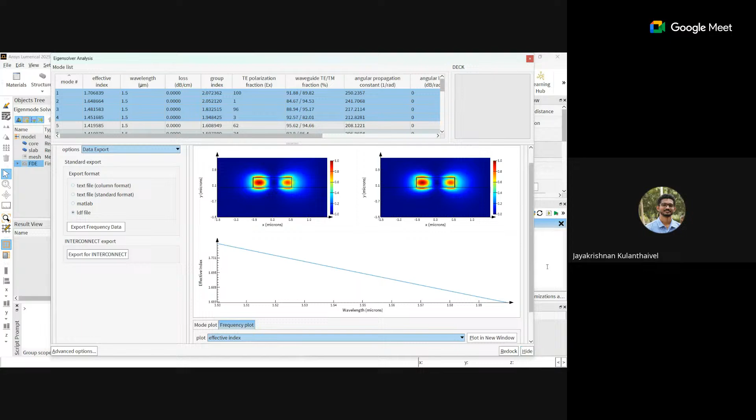So now we have exported the mode properties from MODE, as well as the coupling coefficient from the numerical FDTD. Now we have to create a ring resonator. We have to import these values, the coupling coefficient from FDTD and the mode properties from MODE, into INTERCONNECT to calculate the transmission spectrum. As we have already created a ring resonator structure, I won't be going through the...

Yes, ma'am. There is some background noise, I think, some ringing of something. Is it now? No, it's not heard now. Okay, thank you. Please continue. Okay, yes.

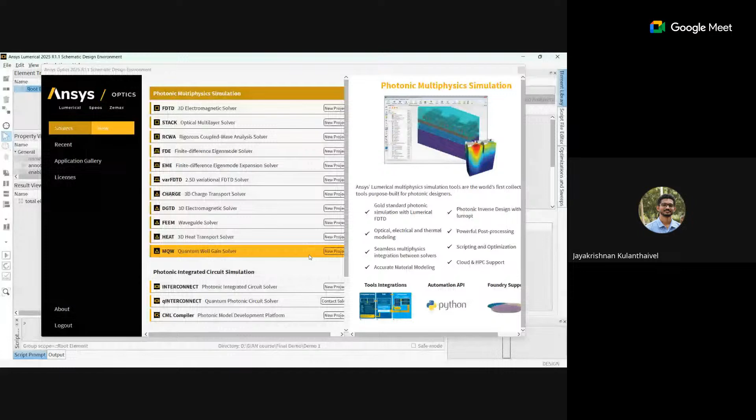So now I'll go at a faster pace; I think we are running out of time. In a similar way we are going to create a structure, but now I'm going to add a waveguide. Previously we added only a straight waveguide. Now you can see there is an option called mode waveguide. Here we have to add this mode waveguide. This waveguide will allow us to import the data from the mode solver. Just name this waveguide straight waveguide 1.

Now click the waveguide and you can see its properties here. I am going to keep the length at 0, since it is the waveguide where I am going to launch the light source, so I don't need it to be very long. Here you can see an option called load mode profile true and load profile file true. If this checkbox is not true, we cannot load the LDF file that we have calculated from the mode solver. Now click the LDF file open, and since this is a straight waveguide, I have uploaded the property. So that's it for the straight waveguide.

Now I am going to import the waveguide coupler. Click this, import the waveguide coupler, and just rename it to waveguide coupler.

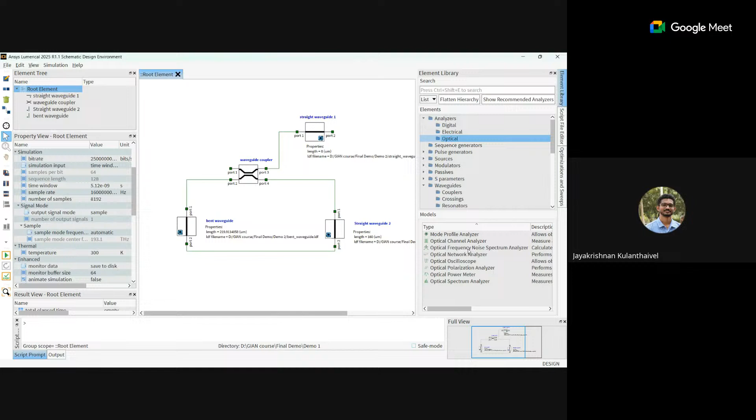Now we need to add the analyzer for launching the mode. So again we are going to add the optical network analyzer. Input to this straight waveguide. Now output to this port, and again check the ONA. This time we are going to type start and stop.

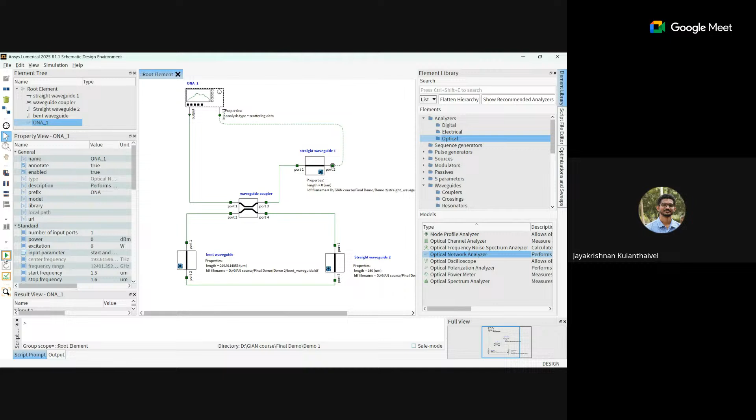So for start frequency, instead of using frequency, you are going to use micrometers, 1.5 and 1.6. I'm going to increase the number of points to 1 lakh. It will give us better resolution. Keep all the other things the same. Now we're going to run the simulation. Now the simulation completed successfully. So click the ONA.

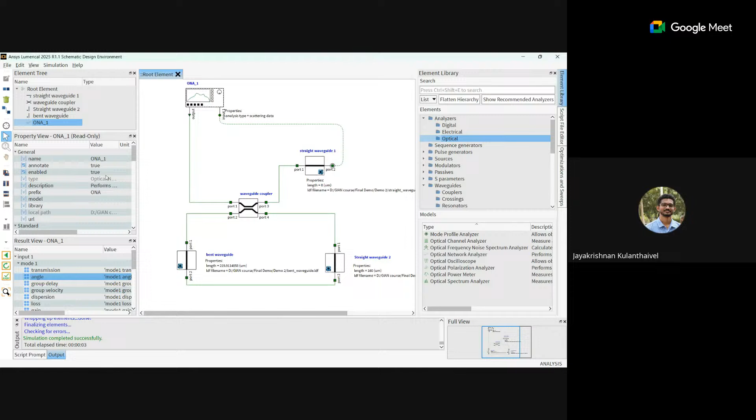Now you can see there are more number of peaks, but this is not the actual result. This might be due to some mode mismatch, but I already have the simulated results. Let me show you that one.

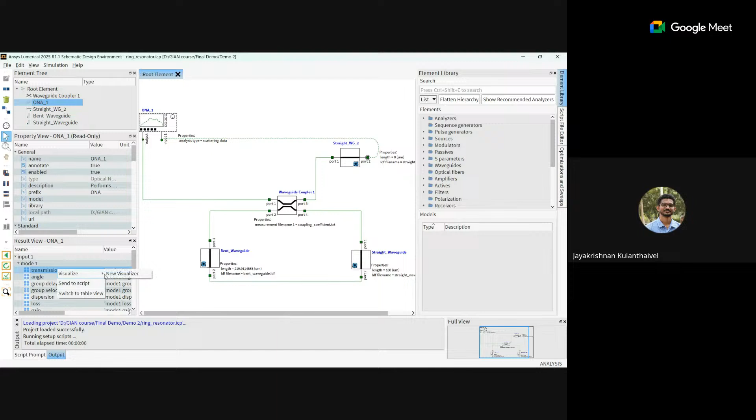You can see the transmission is here, which is similar to what it is here. You can see the transmission, right? So which is similar to that one.

So this is another way of developing the components separately in the other solvers, in FDTD or mode, or in the multiphysics solvers, then importing those data into the interconnect directly, then analyzing the circuit simulation in the interconnect.

So with this, we have completed those two demos. I hope that you might have got to know what are all the capabilities of Lumerical tools and what we can do with the photonic, how we can simulate the simple photonic integrated circuit with these Lumerical tools. As we don't have enough time, we won't be able to show the complete tools capability. We are left with the Lumerical Multiphysics and other tools as well.

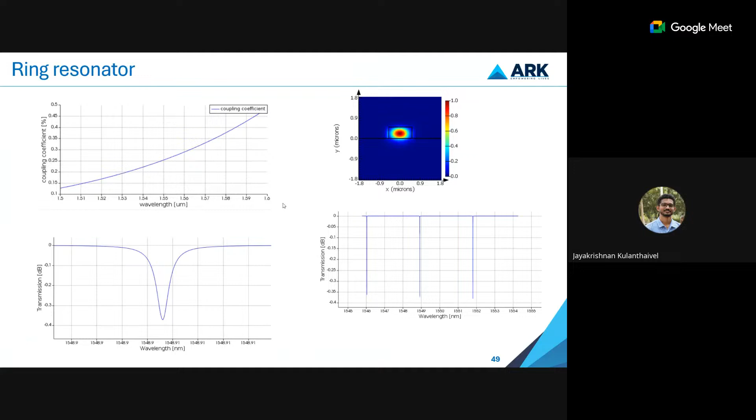I hope this would have been a wonderful, better session for you. This would have improved, given you some idea. I hope so. Next, we'll wind up the session with a case study.

CompoundTek is actually one of the foundry processors, meaning they make ICs for big companies like Nvidia, Apple, Samsung. Having a successful partnership with Lumerical, they were able to develop a silicon photonic grating coupler with a 20 times smaller footprint than the previous coupler and with improved performance. Also, within 2 weeks, they were able to optimize the designs for 8 manufacturable variants that have been developed. So this is one such example that even leading industry foundry experts are also using these Lumerical simulation tools.

So Lumerical tools have a lot of capabilities. This will be helpful and useful for your research as well as for industry simulations. Also, this Ansys Lumerical cloud features are used to scale as well as help accelerate the design effort. It will help reduce the time to market as well. So with this, I'll wind up this session.